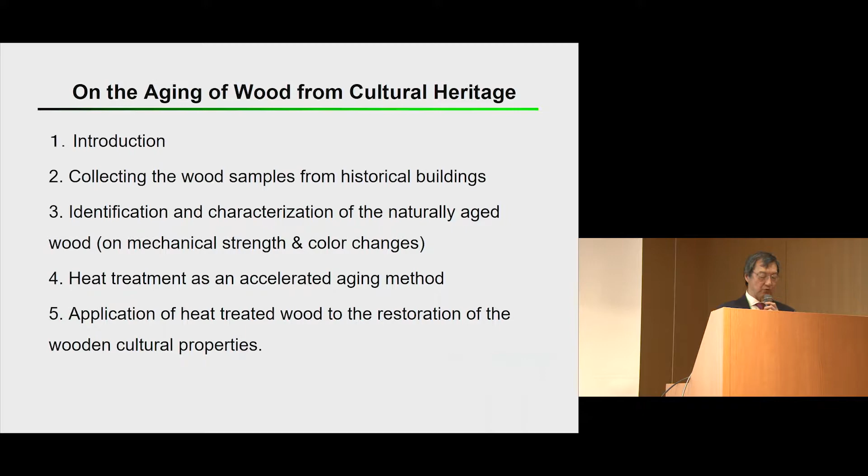Japan preserves a great amount of wooden cultural properties and historical buildings, and the precise understanding and characterization on the aging of wood is of critical importance for their conservation and restoration.

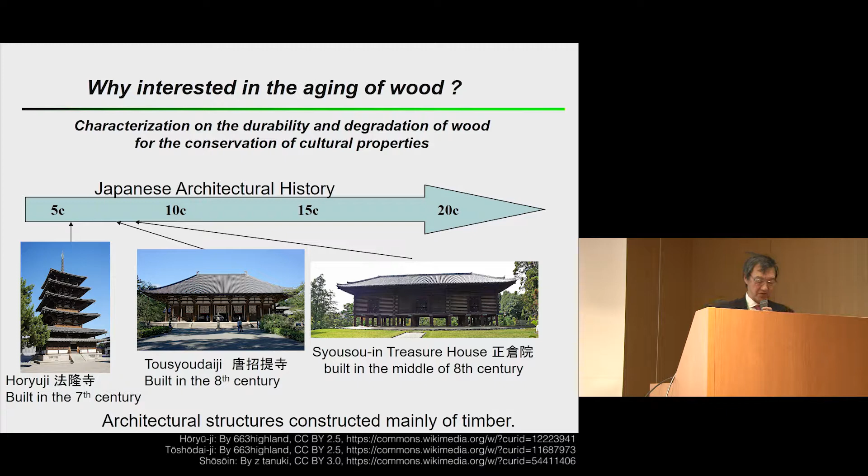Japan's architectural history started at the 7th century with Horyuji Temple. Then we have a massive number of timber structures. It is also very interesting to work on wood aging because this is a multidisciplinary field of studies relating wood science and art history, museology, conservation science, material science, and so on.

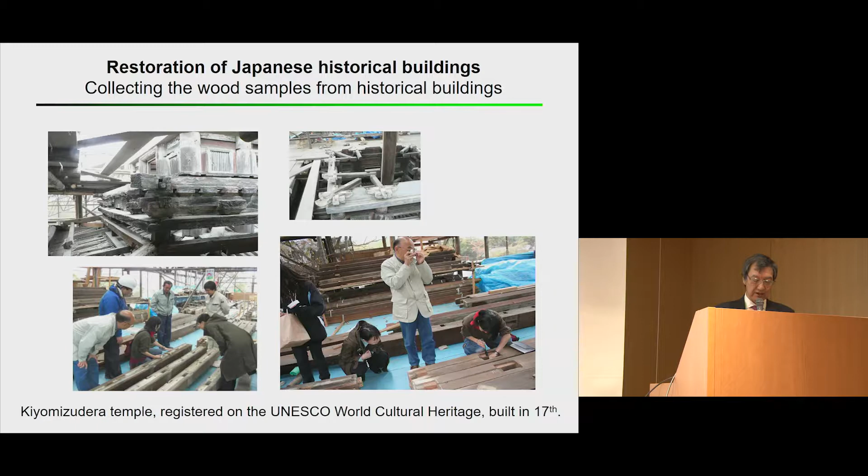Today, I'd like to introduce the research work we did on wood aging from cultural heritage. These pictures show the case of the Kiyomizu-dera Temple, registered on the UNESCO World Cultural Heritage, built in the 17th century. The building was taken apart for repairing, involving dismounting, and in such a chance, we obtained samples of the aged wood.

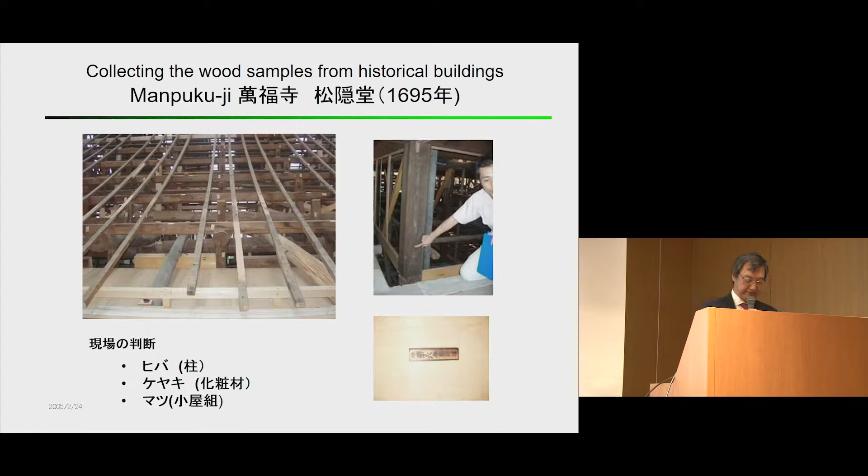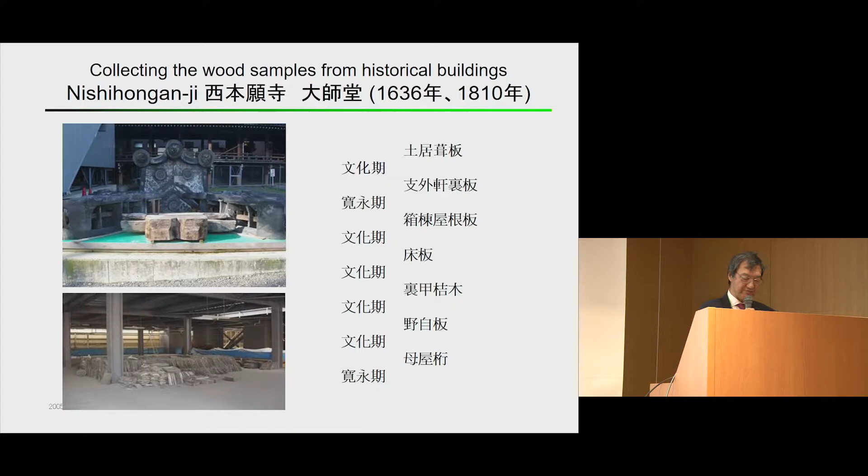So we started to collect wooden samples from cultural properties and historical buildings for around 25 years under the support of the Agency for Cultural Affairs of Japan and collaboration with related organizations.

More than 600 aged wood samples are identified by species and registered at the Xylarium at the Research Institute for Sustainable Humanosphere of Kyoto University, described with historical, physical, and mechanical properties.

One of the most important collections is the sample of the center pillar of the pagoda of Horyuji Temple, built in the 7th century.

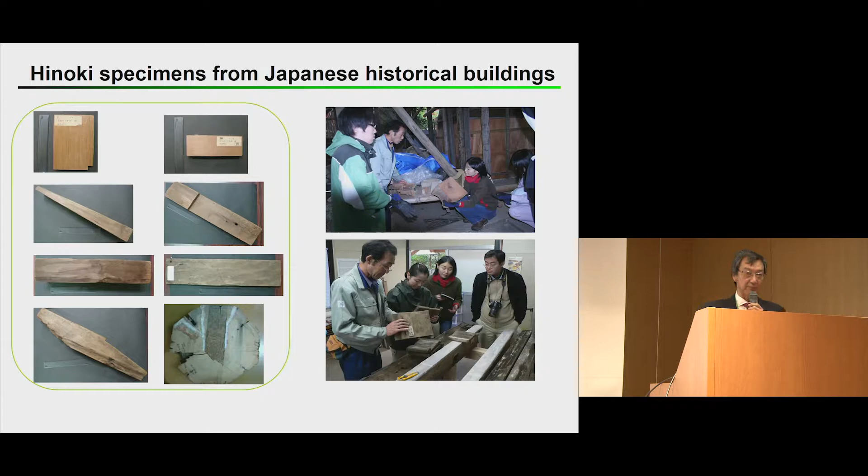We then characterized the age of the wood using the dendrochronological method, based on the patterns of the annual rings, measuring the age of the cell formation of the timber. Today, master chronology patterns have been established for around 3,000 years in Japanese cypress and cedar.

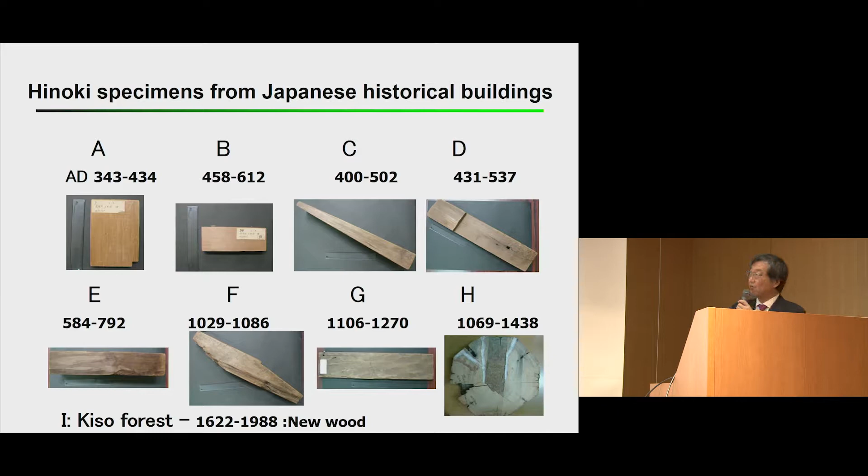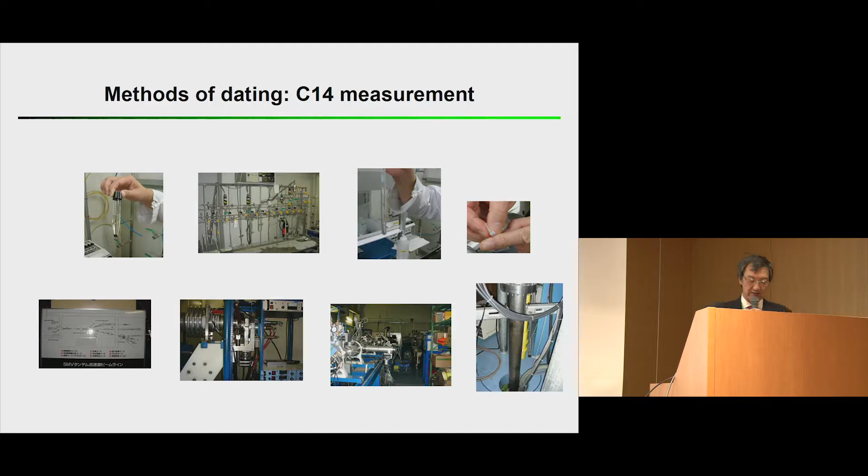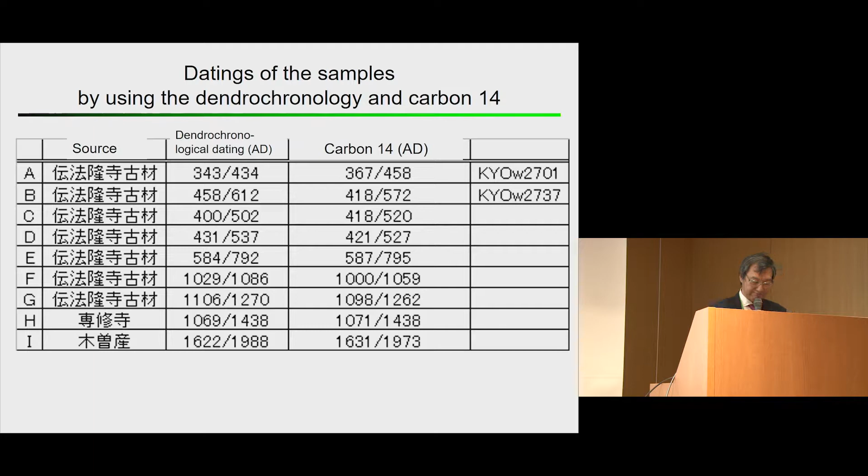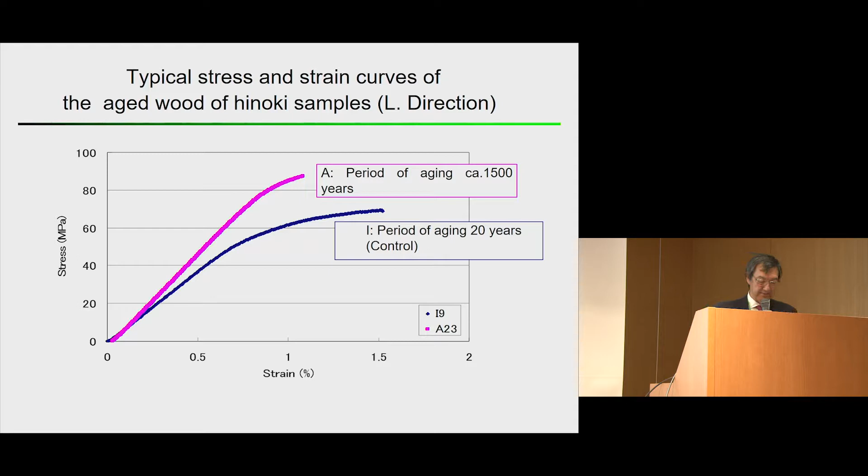However, the toughness is rather brittle in older age trees. So there are certain differences depending on which element of the mechanical strength properties you examine.

So bending strength basically doesn't change much over 1500 years. Wood is actually quite durable—it can last around 1500 years or more.

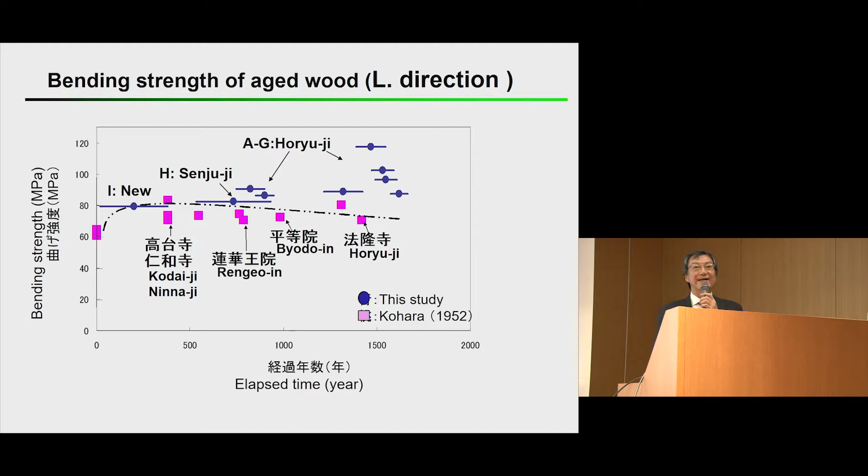So as a summary of the mechanical properties, aging effects were not basically observed in strength or rigidity, but toughness does decrease.

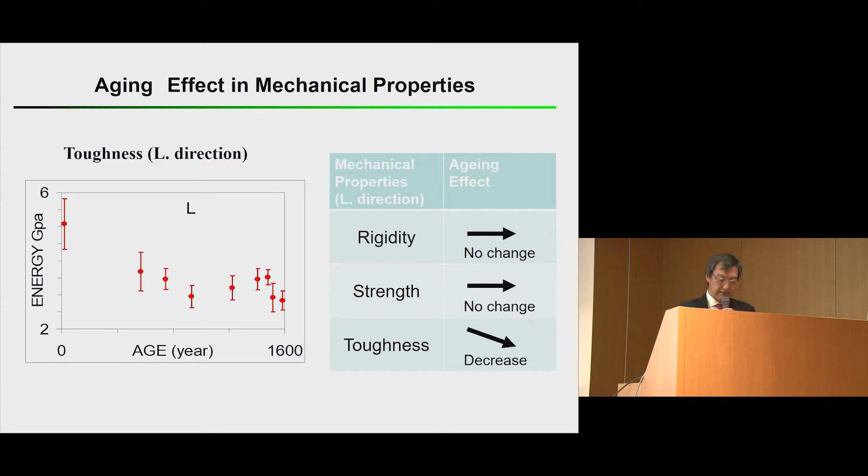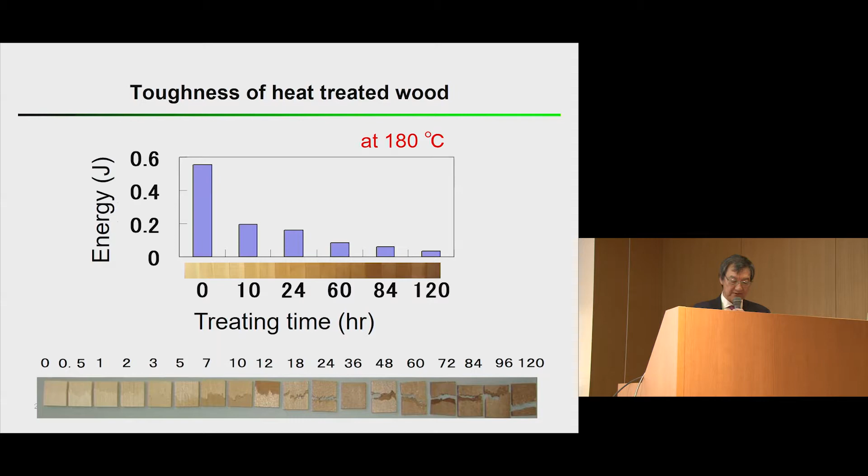And also you can see the color is getting darker and yellowish as the heating gets longer. So naturally aged samples and heat treated samples together: we can see here number one is the control harvested in 1988. Could you see which is which? Which ones are the heated ones and aged samples in number 2 and number 3?

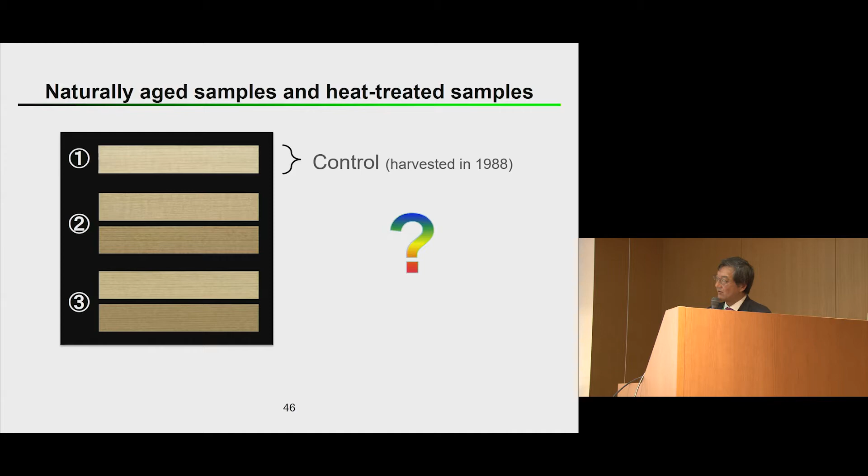The color of these two samples are very similar, and these two other samples are quite similar as well. We can see number 2 is the naturally aged samples, and number 3 is the heat-treated samples. Number 2 here is the aged sample for about 750 years, and this darker one is around 1600 years.

Heat-treated samples, if you see here, at 180 degrees Celsius for 2 hours, and then this one is 12 hours. So the time span was very different, but they behave very similarly, you see, in the change of the color.

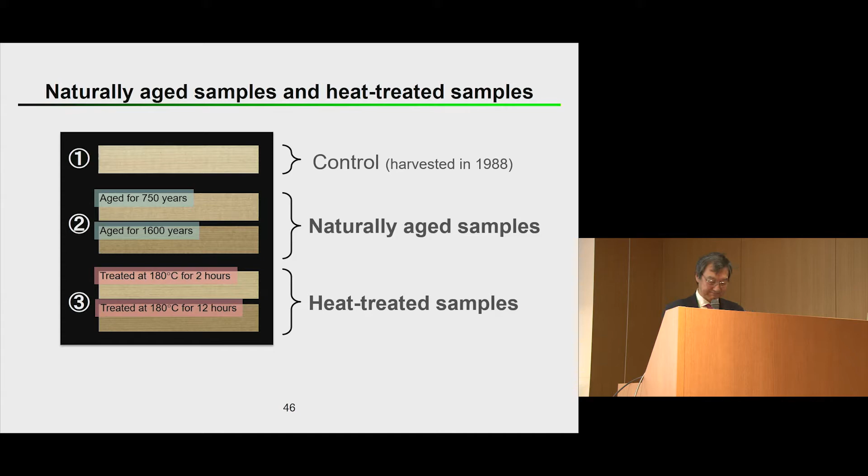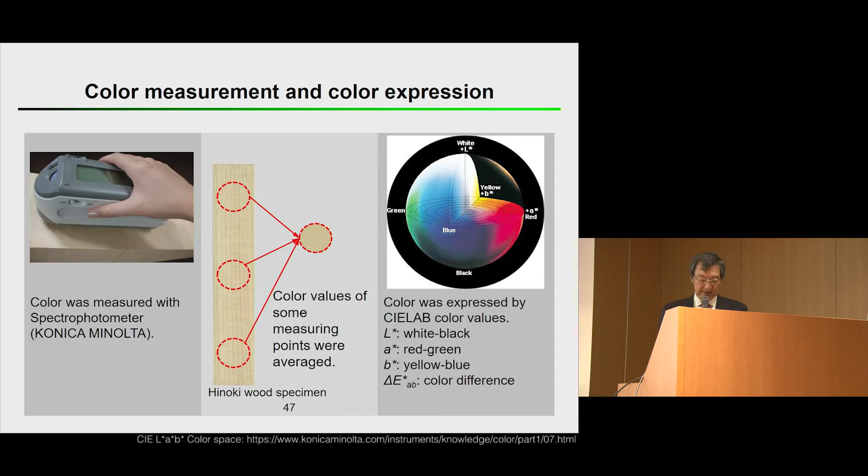This is the result of the delta E based on Arrhenius plot. Here you can see the 90 degrees Celsius heat treatment, 120, 150, 180 in the various heating times. You can see the aged wood as well here, so the color values change quite faster with increasing temperature and aging time in systematic order.

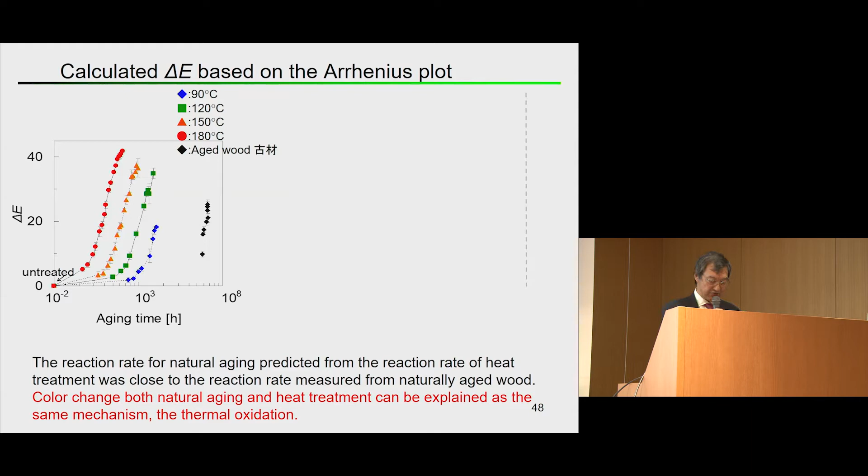We found the color change both in natural aging and heat treatment can be explained by the same mechanism, and that is thermal oxidation, which means the color changes actually obey Arrhenius law. This can be proved as well by the heat treatment of wood sample F aged for around 900 years.

Those are the heat-treated samples with different treating times, and those are the aged ones. We took sample F, which has already lasted for around 900 years, then heat-treated this sample. Then the color changes started from the initial one, aged 900 years, and went darker and darker as well.

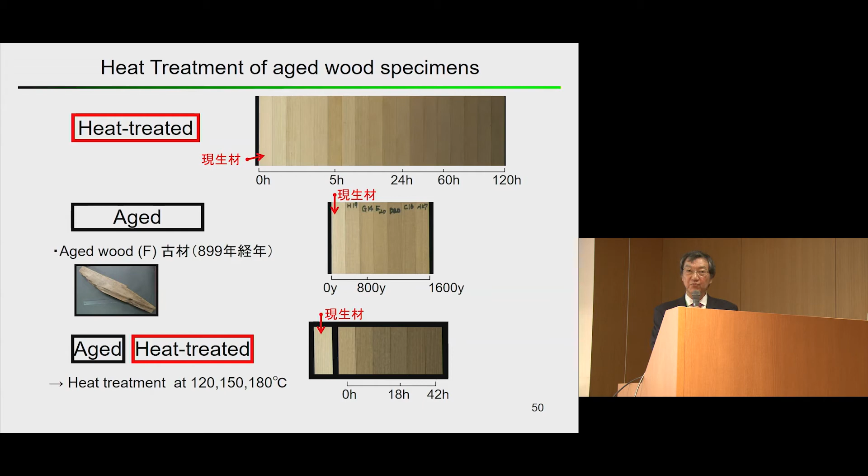So those results show that the color changes of heat-treated wood and aged wood obey Arrhenius law, so that we can control the color of wood by the heating time and heating temperature.

So the application of the heat-treated wood to the restoration of the wood Buddha image, for example. This was manufactured in the 8th to 9th century. The part of the curly hair we call rahotsu here was restored with heat-treated wood, and the color was adjusted by proper heating temperature and time, like this.

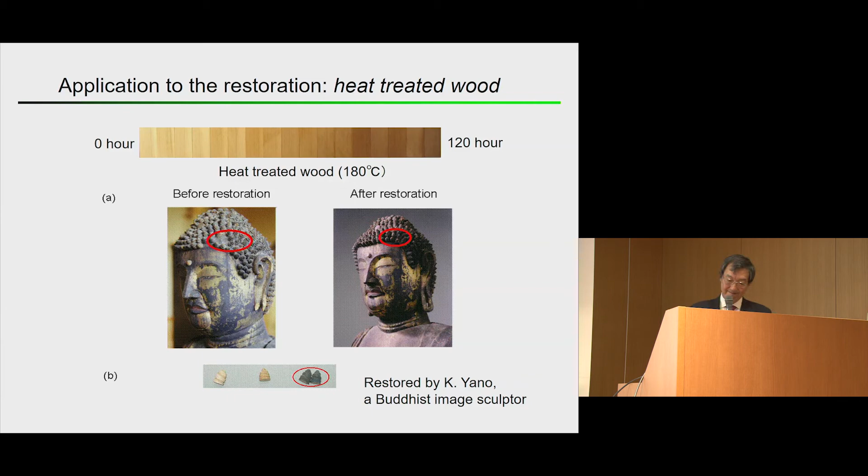Well, another example of the application: since paper is made of plant fibers, and the main component is cellulose, the same main component as wood, we can control the color of the paper as well by heat treatment. The color of the paper gets darker and more yellow with longer heating time and higher heating temperature.

This is the case of the temperature at 180 degrees Celsius. And this is the control, the original color of the paper. Then here, 30 minutes, 1 hour, 2 hours, 4 hours, 8 hours, 24 hours. 8 hours, 16 hours, 24 hours, and 48 hours. So the color of the paper gets darker and darker, you can understand.

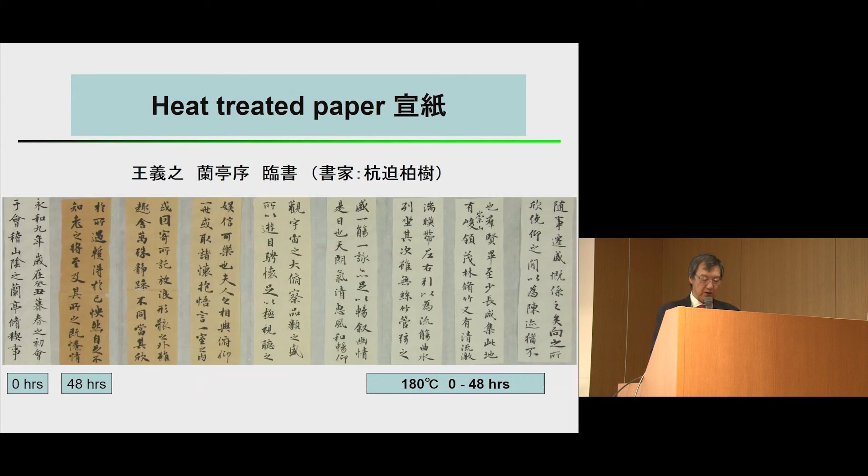And also, at the same time, during such a heat treatment, adhesives are degraded as well. So carbon ink has run and spread by the heat treatment. So in collaboration with the famous calligrapher, Mr. Kusako, we found the treatment of 8 hours at 180 degrees Celsius best, both in color and paper, and the penetration of the carbon ink from an authentic point of view.

Well, I'd like to express my appreciation to those researchers from various fields of the sciences, humanities, and arts, and the Buddhist image sculptors and calligraphers.